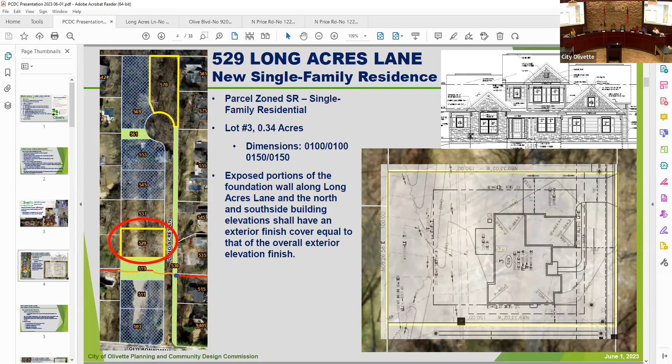Chairman, here you have the petition for 570 Long Acres. This was also on our previous agenda, where there were several inquiries by adjacent property owners regarding the grading, stormwater drainage, and some enforcement issues during construction of the subdivision.

The staff was asked to contact the petitioner to get in touch with the adjacent property owners. I'll let him speak to that. I know he made attempts to contact them, and I've heard from at least one resident that they did have a discussion. I'm not going to say it was a resolution, but they did meet and talk about the site. I know the two adjacent neighbors are here.

But before going to that, I want to talk about this petition. Again, the grading within this petition isn't directed to the stormwater basin for the site. There are two basins on the site grounds, and this one doesn't use them. What MSD required here, and you'll see it back here, is an undisturbed buffer that is supposed to mitigate the stormwater on the site grounds.

Now, under our stormwater management ordinance, only the house footprint is exempt from having detention required on the site. Because this is a subdivision approved by the Metropolitan Sewer District with its own full detention system, it is exempt. But detention is not exempt for any of the accessory structures. So the pool itself will have to provide some type of mitigation for the stormwater generated from the pool grounds, because that was not accounted for when we did the preliminary reviews and the regrading.

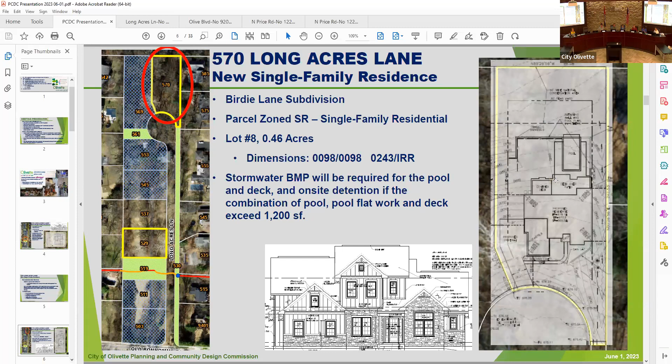So when you look at the pool and the flat deck work area here, that will be required to have its own on-site detention, separate from the house.

Now, there were concerns, and there were two components to them. One was regarding more of an enforcement issue during the activity of construction, and some erosion, siltation, and flooding experienced by the adjacent owners, specifically back in July and August. But also, overall, some of the grading changes adversely impacted the adjacent neighbors.

Regarding the stormwater and how it's handled on this site, I've blown this up a bit better. This is still the existing stormwater plan submitted by the petitioner. You can see the two houses here off of Dielman that directly abut the proposed, well, the existing lot with the proposed house.

You can see along here that the petitioner is proposing a defined swale that runs through here, redirecting that stormwater all the way parallel along the property line to the back of the yard, then natural flow back to what will essentially become floodplain after the new FEMA maps are adopted, specifically up by the bike trail. That would redirect any impact. They are also proposing a retaining wall along the front yard, which would help mitigate that.

And with what they're doing with the pool and flattening out the backyard area, that again removes a lot of the slope activity along the adjacent property. That mitigates either slowing down the velocity of the water, or redirecting the velocity of the water to the lower points, which are specifically back at the edge of the retaining wall. So I did want to point those out.

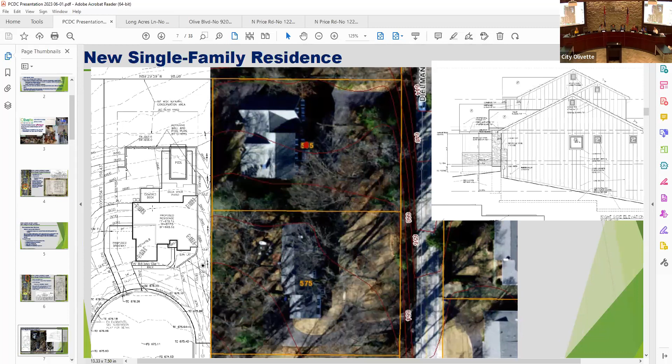Thanks. Okay, any other questions? Go ahead, Brian. We'll hear obviously, I imagine, from everyone, but I guess setting aside what happened or current concerns during construction, Carlos, do you feel comfortable that this will address any future, not worried about the now or the past, will this address future concerns around water, in your opinion?

Well, it won't completely eliminate any future potential impact. The grading has changed, I mean, no doubt about it. Compared to what was there before, it's been altered, but the direction still continues in the grand scheme where it's supposed to go, to the lower points in there. At that time, it was all dirt.

And the siltation had failed, and we had a pretty significant rain event in there that I would like to say is infrequent, but may become the norm over time. Once the property is improved and the swales put in place, it should minimize and not be recurrent like the conditions they faced, unless there was even more intensity of rain.

And there was two days of quite the intensity, but I could not say that we could get an event again that could cause a significant amount of stormwater going to lower properties. I think what they're doing at least tries to address it, but I don't want to make a promise that this would work. No, of course, because you never know.

I'm just curious, other things that you would suggest that wouldn't be above and beyond crazy or ridiculous to ask, but would also increase effectiveness. Well, I think by leveling with the pool and leveling some of that backyard and redirecting it, that does help in the process. And again, within that 12 feet, having that swale the full length from the front yard running all the way back.

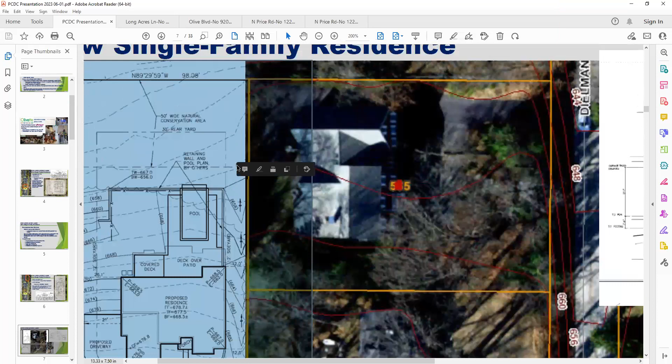Just curious - I know you weren't able to talk to the other neighbor and hopefully we'll hear from them, but would you be willing to do the same accommodation if they wanted it? Well, I'd be happy to help out, but going down to the next house to the north, which is basically at the bottom of the hill, he's collecting water not just from my lots - he's collecting it from the 3 houses above him. I'd be happy to help out in any way I can. We'll cut our swales in and do what we need to do on our lot, but I don't think I can remedy him not getting water from the 3 houses above him.

No, but if we can try to make sure it's not coming from the proposed residence, I think that's... Well, some of the water naturally went there always. With the pool and all that they're doing in the back, it'll help that substantially, a lot better than it was. And I think that's a positive aspect of it.

We'll grade the swales and do what we can, and I'll be happy to divert as much as I can. But after walking the site today and other days, he gets a lot of water from up above - he's getting it from the 3 lots above him, besides me. And the nice thing about ours, as Carlos explained earlier, with the curb of the street and the retaining walls of the pool and the detention, we're actually going to lessen the amount of water going his direction than was there originally.

Well, that's definitely the goal that we want. No, I agree with you. I don't want to be a bad neighbor, and I want to do whatever I can within my control to alleviate that. But after walking it, even if I do a little, the water's still going to go down - he's the low point on the right side, so he gets all the neighbors' runoff on this one lot.

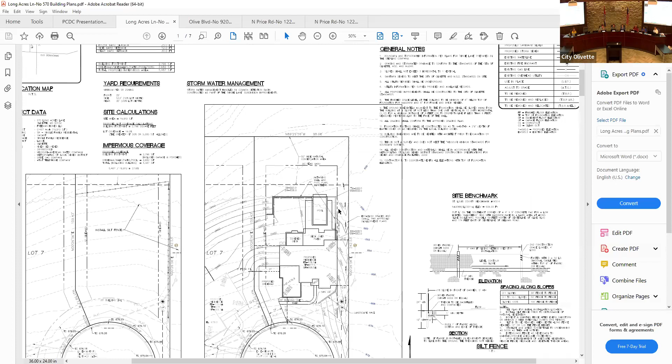And what I can do, Chairman, if you don't mind, is go back to the broader survey here. No, I was parked here. Hold on, like this. So yeah, somewhere at that point it starts switching sides.

What's directly to the north of the property? Is it the creek? No, there's an existing house just right about here. Bear with me one second and I can pull that up. So you can see the house structure here at 585, and then there's a house, a driveway right here, and a house kind of catty-cornered. So here's where that lot line runs through.

I'm going to jump back over to our PDF file. This may not be working online, but that house is roughly about on this area right here. So where the water's going to go in the uninterrupted area is more to the left, to not impact that house. According to that plan, yes. And then, this isn't on tonight's agenda, but if you bear with me one second, the property right behind them that we're looking at is petitioning for a subdivide.

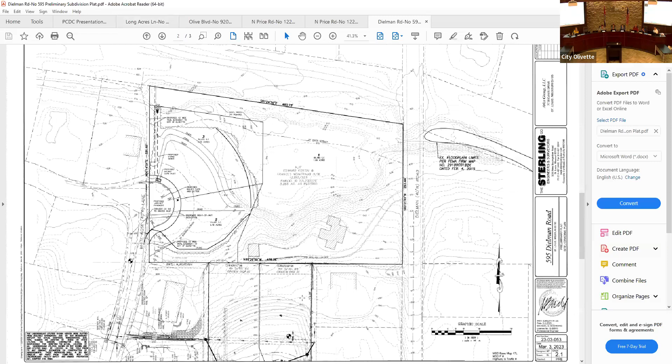So we can take a look at it here. I could have done an overlay, I didn't think about that. So here's where the new house and pool would be placed. And you can see a majority of that is headed northwest. In there, that break turns here and then starts going directly north, and then to the southeast on this side.

And I think you can see here. But Mr. Freeman's talking about that's what's coming down on here and then along the edge there. Well, we don't want to make it worse for people, you know. And it sounds like potentially what Mr. Freeman's saying is it could make it worse. I wasn't hearing you. You weren't? Okay, no, good, maybe.

Does anybody else? No, I think it's... No, what I'm saying is I don't want to - just like Carlos said earlier, I can't say it's going to be worse, but from the way that it's grading, it should not be worse. But I don't have the crystal ball. If we have a 4-inch rain, what happens?

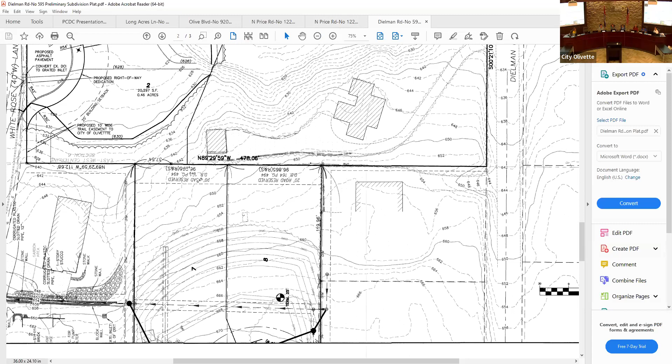Would you be open to adding some extra stormwater retention from the roof gutters, since you're already going to have to do something with the pool? I think what you're going to find out is that I'm going to run that to the storm detention anyway. But that roof gutter on the right side, as I spoke to Tom before, there's only going to be 2 gutter downspouts on that right side. That's the low side, the one-story area of the master bedroom, so that roof isn't going to collect a lot of water.

So the majority of the main roof is going to move to the other side, to the east or west. The master bedroom, that small single side you're looking at in the plans, would be on the east side, which isn't going to collect that much water.

Okay, go ahead, Karen. Yeah, it sounds to me like the developer has paid a lot of attention to this issue and designed the site carefully, probably as well as we could expect. We can't predict unknown future rains. The weather's changing, the rains are coming in harder, but how much harder, into what intensity, we have no way of knowing. But it sounds like for what we know, he's done a really good job to me. Okay, good.

Anybody else? How's everybody else feel? Good. Okay, unless you have anything else you'd like to say, otherwise I'm going to request some public comments. Thank you. Any public comments?

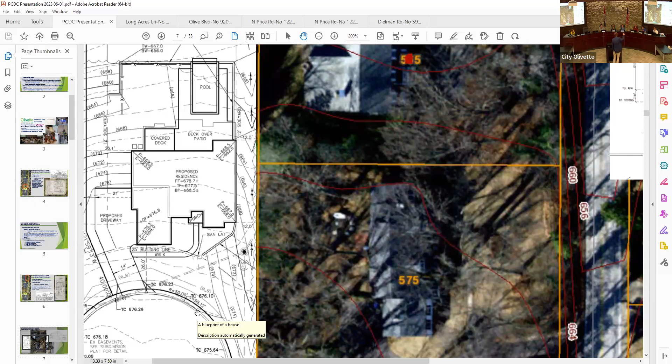With the grade and the proposed walkout basement — sorry, we shifted — about half of the building is fully visible as a 3-story building, 2.5 stories, and proposed to be right on the setback of 12 feet.

While undoubtedly fitting the conditions of the committee, I would not say this fits the community design standards of building with your neighbor in mind. That said, I met with Mr. Freeman today, we had a very nice talk, he's a very nice guy. We discussed the water issues, and he agreed the current swale in place is not doing its job. He suggested adding a berm, as mentioned. The retaining wall I had previously discussed, going from the house all the way to the property line, he says isn't possible because it goes above the sewer lateral. So understood on that — I thought this was a good kind of suggestion.

With all that said, I had a couple modest changes I'd like to propose. If we can lower the foundation by a foot, I think any little bit helps — that would stay within the current level and allow the standard 8 inches for the foundation. If we could move the house 2 feet off the current setback line to allow for the movement of the swale and the addition of a 2-foot berm, I would approve the slight elevation changes and access to my property. My understanding is a 2-foot berm would need 6 feet of elevation to the side to meet the 3-to-1 elevation rule, so that would go 2 feet into his property and 4 feet into mine. I'm fine with that, as long as we don't lose any big trees over it, but I think we're pretty far ahead — he seems like a good guy.

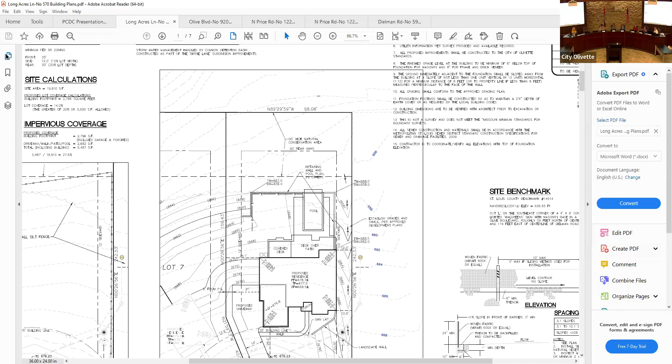Let's go back here. I'm not sure if they have a cross section here. Yeah, that's one of the things we didn't request in the process, to get a cross section along that street. So the only elevation you have is kind of that side here.

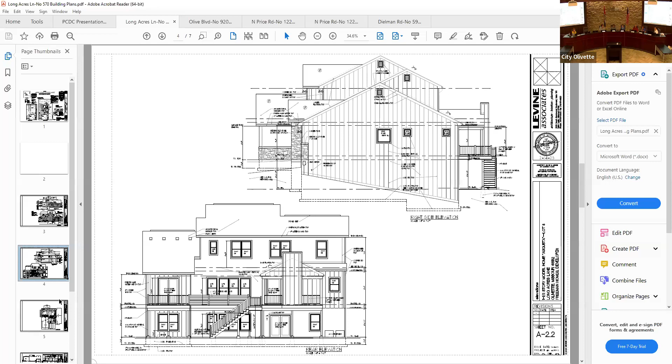I'm not the architect, but a designer, and looking at that side elevation, I know Mike and others usually request a little bit more in terms of windows or uniqueness on the side versus one window. Curious if anyone else, maybe we're not even approving that right now, but Carlos, do you mind going back to the side elevation?

Sure. Yeah. I don't know, others would know better. I'm an engineer, so. I'm a lawyer. Carol, you're on.

I'm not a designer, but I think it's broken. If you want my opinion, it looks like it is broken up rather than just one solid face. It does, the fact that it goes down more. I concur. If there was no articulation whatsoever, I'd say yes there's a problem, but there is some there, and I'm only reflecting what I've heard others say in the past in terms of adding.

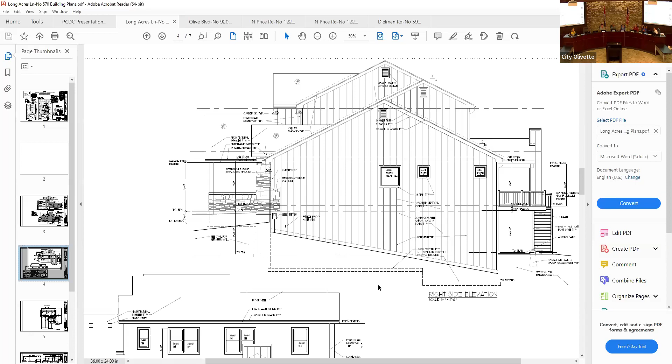I don't particularly feel strongly either way. Carlos, if you go to the contours, can we count them to see what's existing versus what's shown on the left? You can see the 672 here that gets to the curb, and their top of foundation is 677.5, which is about 26 feet away there.

So that's about a 1 to 5 slope. Is there any way possible to appease some of the concerns of the neighbors and reduce the top of foundation? I think the key thing would be that if you drop the foundation down, which again is possible, then you shift the house back, and that's something they'd have to consider in that process.

The reason is that to have the walkout as designed, this has to be higher than the elevation behind it. Right now you have a basement floor at 668.5, so that 668 kind of runs along here. Isn't that 662? That comes in and then veers back, the same thing, right here. So that's 6 feet higher.

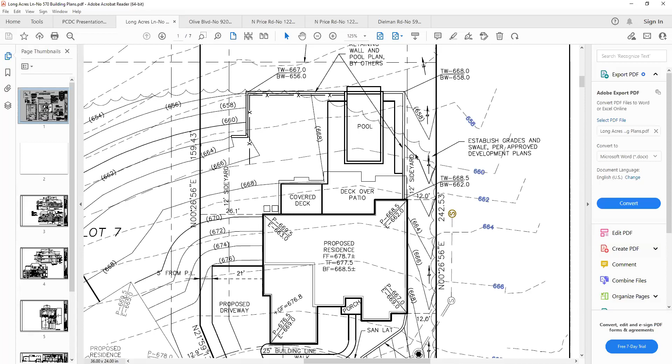You might see 12 inches less of siding, and I can see where they're coming from on that, but personally, I would leave it up to the engineer on how it really needs to set with the house that's being built currently to the west of it, with the driveway and all that. And I don't think we can correlate with Carlos on the aspect of moving the house, trying to move it back and over. It starts to affect a lot of other things, and I don't think those things affect stormwater.

Understood. Help me out, has lot 7 already been approved? Yes. Okay.

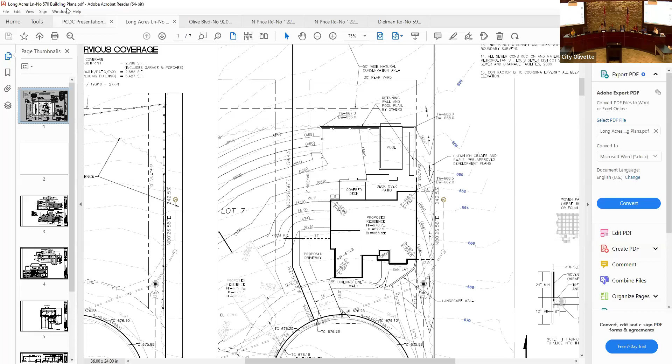Chairman, I'd like to make a motion to approve the petition for community design and concept stormwater management plan review for a new single-family home at 570 Long Acres Lane. The presented memorandum from the Department of Planning and Community Development dated May 4th, 2023, subject to staff conditions noted therein.

My only request would be if we add a condition that he speaks to his engineer to see if it would be possible, in relation with the other property, to reduce the type of foundation.

Can I add a condition to make sure they're speaking to the neighbor, maybe in staff presence, to look at other options? Not saying anything's wrong, because it's within code, but if they haven't connected in many weeks, that's my concern. Be a good neighbor in that regard. I would agree.

Carol, are you okay with this? I'm okay with this. Okay, good.

Motion's been made, amended. Just to note, in there because of the recordings, like Jennifer, when she goes back and takes a look at that, you had noted in the first one Commissioner Wagner made the motion, Commissioner Lewis seconded. Sometimes you'll follow it up, sometimes. Yeah, so keep doing that, right? Yes, alright, thank you.

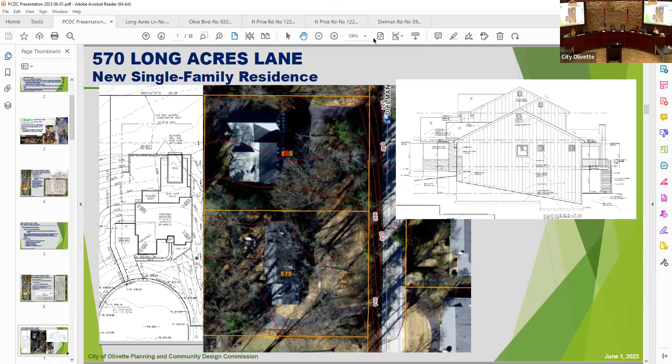Okay, we'll move on to new business. Carlos, I know you'll need some time, but I'll go ahead and introduce it. It's item A, 9200 Olive Boulevard, Suite 126, Shoppes at Price Crossing, the wine merchant.

All right, Chairman, I'm going to have 3 special permits before you, so I'm going to quickly go over the special permit process Ms. Doty put together for me here on the slide. Special permits are actual uses called out within the specific zoning district, but have additional conditions applied to them. Sometimes they're unique uses that, if they comply with certain standards beyond the basic underlying zoning ordinance, may be compatible with the surroundings or the district itself.

A special permit is reviewed by the commission, and the commission only forwards a recommendation to the council whether it should be authorized or not. The council considers the authorization through an ordinance. Each of these special permits actually have their own little ordinance that's codified in our code of ordinances. In there, it will identify the location, the use that was authorized, and any conditions necessary to mitigate a use that was placed.

The commission has a wide array of options to consider in efforts to mitigate potential impacts to the site and its surroundings. You can control hours, aesthetics, and things above and beyond what you'd normally control in a home review. If special permit uses aren't following through on their conditions, the city has the ability to pull a special permit, to rescind it and take it back. That's part of the process. There's a whole process on how that is determined, so it's not used indiscriminately, but that is in there.

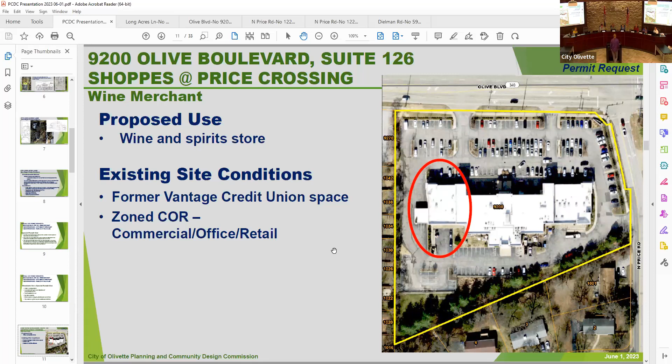Thank you. Glad you're moving in. Yeah, thank you, we're excited.

Are there any public comments related to this item? Seeing none in the audience — Carlos, is there any public comment online? No, sir. Okay, that being said, do I hear a motion?

Chairman, go ahead Carol. I would like to motion to forward a recommendation to the city council to consider authorizing a special permit use for the operation of a beer, wine, and liquor store, NAICS 4453, not to exceed 7,000 square feet, to be known as the Wine Merchant, as presented before the commission and noted in the memorandum from the Department of Planning and Community Development dated June 1st, 2023, subject to any staff conditions noted therein. Motion's been made by Carol Wagner.

Do I hear a second? Second, and seconded by Brian Lewis. Carlos, will you please call the vote? Commissioner Wallach, approved. Commissioner Lewis, approved. Commissioner Wagner, approved. Commissioner Jurgell, approved. Motion passes 4-0.

The next step is that this item will go before the city council. We anticipate the first reading would take place on June 27th, and a public hearing on July 11th.

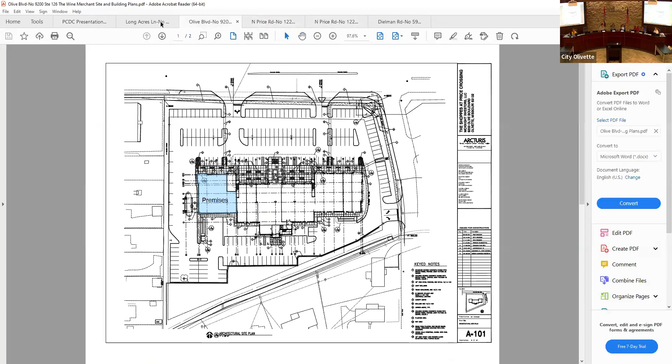Then that would have to go to council. And I do have a representative of the petitioner here. You do have plans of the building. It's a very simple building for storage. The information regarding the exterior finish is important because that's where a majority of what we do in that process, so I do want to go over that real quickly.

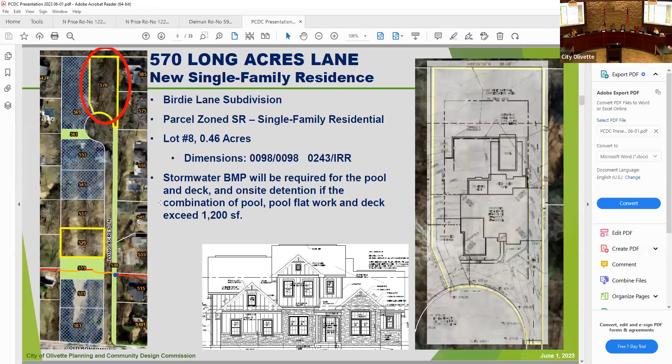I think I just closed my presentation. Bear with me one second, Chairman. No worries. I don't see it. Yeah, I have it.

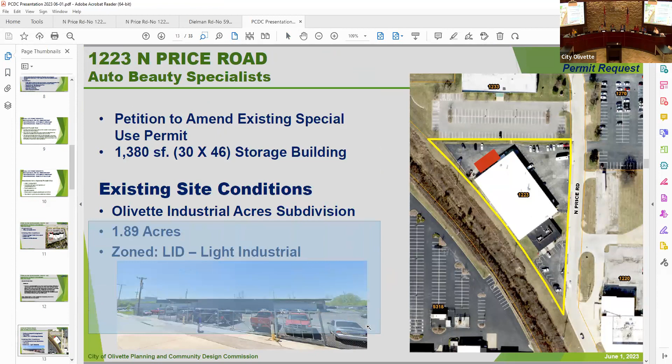Okay, so here's an elevation of the existing building. You can see they have some seam metal along this elevation here. I don't think getting any closer is going to show you in there. Now, within your plan set, I did ask for something more specific as to what that exterior finish would be. So you see it's a metal panel system, not corrugated in any way like the front exterior is. It would essentially be a similar type of building on the exterior.

What's the building going to store? I will let the petitioner answer that. I know there's been discussions within my staff and the fire marshal, but I think it's more the additional parts and things as they're transitioning to electric vehicles. This looks like a paint booth. This is a paint booth within the building itself, but the exterior finish is going to be similar to that panel system. Understood, understood, thank you.

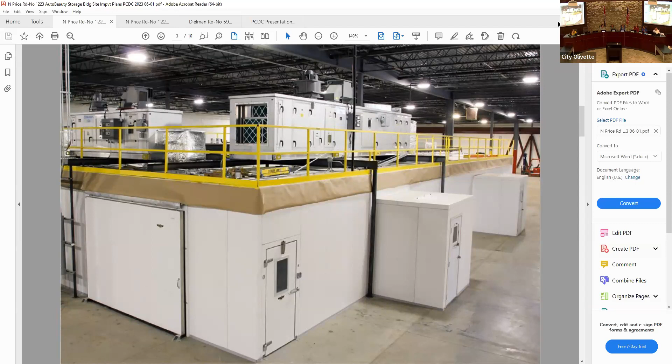Okay, anybody have any questions or comments for Carlos? Carlos, when I was looking at the site plan, it looks to me like this building would be pretty much hidden from view because there's an easement behind the building and there's a parking lot on the other side, and the building itself sits at an angle. So it's not something that most people just coming past the building or going into it through the front are ever going to see.

Correct, and we were cognizant of that, and I think they took that into consideration as they looked at other opportunities within the site grounds. Similar to what we just had in the petition a while ago, they did approach the Murphy Group because the Murphy building is kind of situated facing the back of their property. So they did reach out to them and had a discussion. I'll let the petitioner address that, but there was no opposition. And then we also did our notifications in the process.

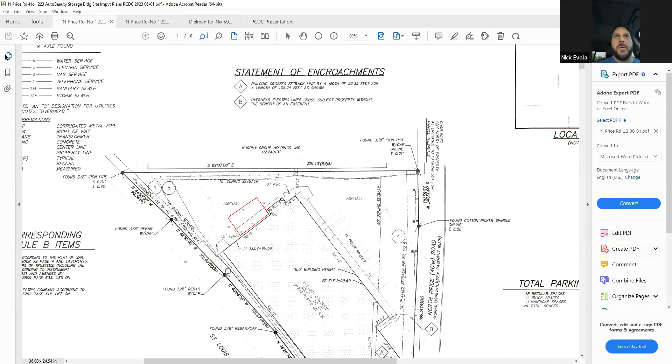The purpose of this storage area is to free up room from our existing building to focus on a lot of the proprietary equipment and everything we're getting for the electric vehicles and our business model change toward electric vehicles that is happening in the existing building. It's just freeing up the room from that area.

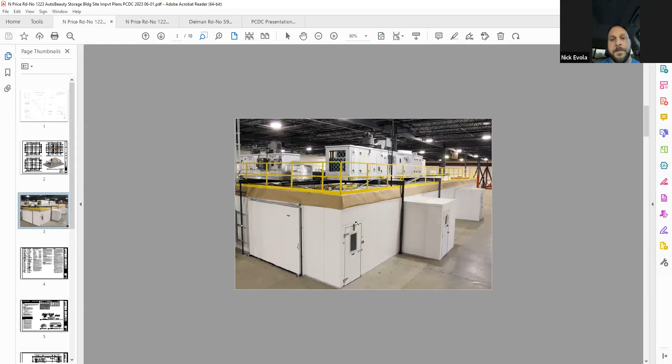Makes sense. Are you going to have to enter and exit that building from the outside, or will it be connected to the building from the interior? It will not be connected, so it will be separated.

We've done all the fire code work to make sure that where it is placed with the existing building we meet fire code, and we're still able to have enough distance from the Murphy lot to meet the Murphy lot for the fire truck or fire department to be able to go through.

Good. Carlos, did the fire department have any issues with this? No, not under this scenario. They work closely with Fire Marshal Fain, along with our senior building inspector Kurtz.

This was interesting in terms of what they looked at trying to do to add the additional storage space, finding out that through the building code, doing an addition opened up a whole bunch of other issues regarding firewalls, the sprinkler system, fire suppression, and all that. The most reasonable and economic means for the purposes of what they're doing was to have it detached. Then the question became how much detached, and I think the ultimate compromise was the 2 feet before we started going into another bunch of code issues.

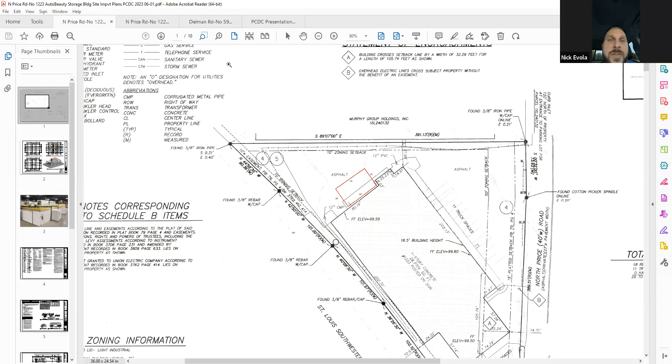We will be doing both. We're not going away from traditional vehicles by any means, that's still primarily our workload. But as Carlos mentioned, we have Tesla now, and we are currently looking at two other manufacturers, Rivian and Lucid. It's definitely something we're pushing forward, trying to be ahead of the game as far as the collision industry, and we like to consider ourselves one of the strongest collision repair shops in the state of Missouri. So we have a lot of certifications and accolades to back that up.

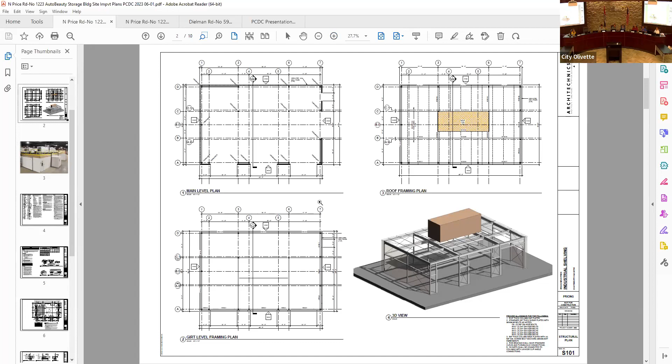Thank you. Does anybody in the audience have any questions or comments related to this agenda item? Seeing none, Carlos, can you check online? There are none, sir.

Okay, do I hear a motion? Mr. Chairman. Go ahead, Carol. I'd like to make a motion, and I'd like to do this as an amendment to the existing special permit.

Does that seem reasonable to all of you? I'd like to motion to consider the petition for a 1,380 square foot storage addition at the property addressed as 1223 North Price Road, as an amendment to the existing special permit use authorized under ordinance number 2565 to Auto Beauty Specialists, and approved for the site plan, community design, and concept stormwater management plan reviews as prepared before the commission and noted in the memorandum from the Department of Planning and Community Development dated June 1, 2023, subject to any staff conditions noted therein.

Motion's been made by Carol Wagner. Do I hear a second? Second. Seconded by Sam Wallach. He beat you just by a hair.

Carlos, will you please call the roll? Commissioner Wallach, approved. Commissioner Lewis, approved. Commissioner Wagner, approved. Commissioner Dragell, approved.

The motion approves unanimously as an amendment, and therefore the next process is for the application of the building permits to proceed. Thank you, sir.

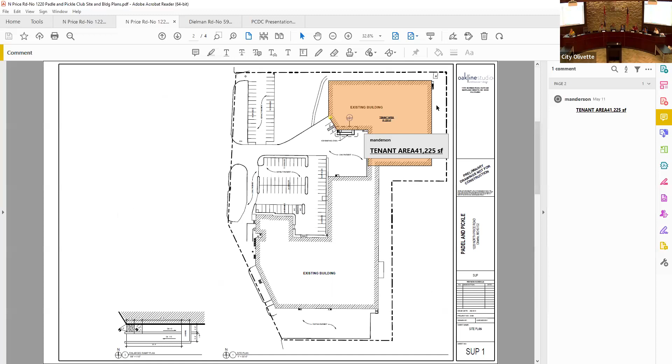They're looking at a St. Louis location. They like the site here, and you have copies of the plans that show both the site grounds and the area they would lease, which is a little less than 42,000 square feet, along with how they would design the interior and the number of courts.

They're not asking to utilize the basement area in this proposal, and that could be a future leasable area for a different use. That's the breakup of the building.

But I'm going to go back here—it would be a private for-profit club. You have a description of the business and the proposed business hours, along with a bit of information on the business model as a whole.

We have a representative here with Intelica CRE who can address any questions.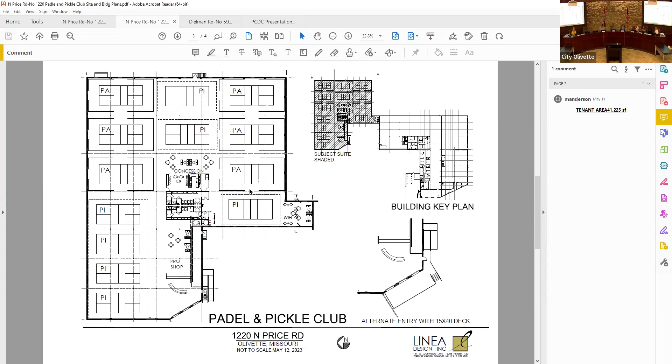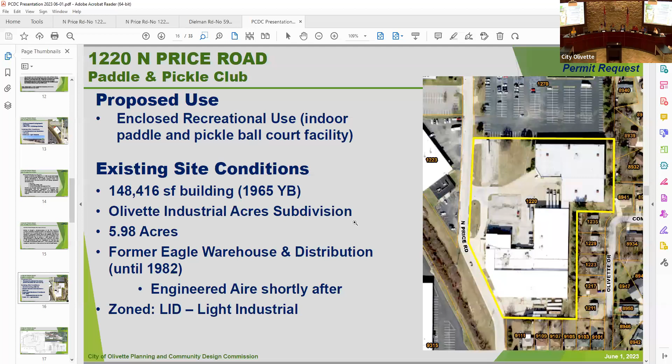In terms of the review, this was a unique use, but recreational uses are authorized within our light industrial district. I think it's a good reuse of the site, something different, something not anticipated.

The only issue that would come up in that process would be parking, because this initial building was designed as a warehouse, which has a minimal parking load. So we did take a look at how a use like this would impact the reuse of the rest of the building, and it's pretty reasonable. I think our parking requirements for warehouses are pretty high, and we haven't touched those in a long time.

We probably need to reevaluate those, but they have approximately 121 defined stalls on the site. They can have a lot more depending on how the site is laid out.

The surface areas of the site are laid out there, because this was a traditional warehouse type of user, but if we go into more entertainment or service type of businesses, a lot of those dock doors probably won't be operable, and you won't need the big maneuvering areas that were necessary for some of those.

So at least, visibly, there is at least 121 stalls on the site. The current user or proposed user would need 26 by code, and we ran different numbers. Of the 121 stalls, all they need is 26, so they would be okay. But we have to be cognizant of what about the rest of the building, and how that is going to impact the viability of the building.

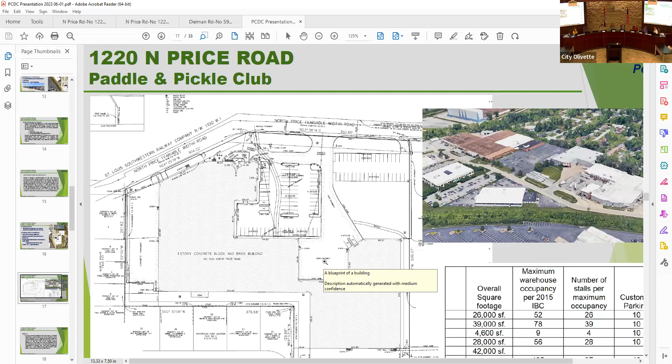If they restripe here, depending on who their final users are, they can probably pick up a whole bunch of additional stalls. Right now it's kind of laid out for the traditional warehouse drop-off, pickup type stuff, so they'd have the lot near the curb, and then there'd be a large green space in between. The one thing I wish I could do is, green space is not sacred, especially converting that green space into additional parking, which I think would be beneficial.

You see it as it's utilized over here. However, that then may trigger MSD requiring some type of on-site detention, which might make viability or reuse pretty difficult.

Carlos, what's the building made of? Is it concrete or is it metal? I believe it's concrete block, it's masonry. I was just concerned about noise. Yeah, good question. Yeah, we did talk about that. Go ahead, Brian. I'm sorry.

They mentioned a bar as well. Is that okay from a zoning perspective? Like them serving, is that in the area zoned to allow that? It's an accessory to the primary use, so therefore it would be permitted. And there may not be a bar where I can just walk in—you'd need to be a member. But if I'm a member, it would be one of the amenities I would have on site.

So it's not treated like a restaurant in that regard, correct. It would be for members only. Interesting. They would need a liquor license, but they're not under the same conditions as a Phelan's or something like that.

And the special permit would recognize that or note it in the site plan as they've illustrated. Very exciting new use for this. I think every once in a while you get these, wow, never thought of that, and we can make it work. And we had a good partner in this process.

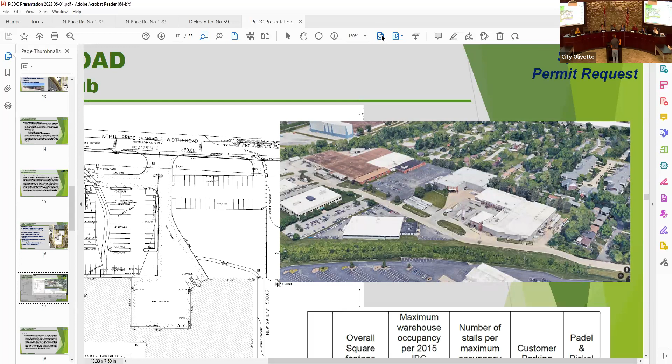Is there a petitioner from the tenant side online? No, there's nobody on. Just making sure. If you can state your address and whether you're related to the building, residential or business. Business: 11701 Borman Drive, Maryland Heights, St. Louis, Missouri, 63146.

I can do my best to answer any questions you might have. I'm a little more familiar with the building than the pickleball concept, but on behalf of the landlord, I think it's a great use for the site. We're excited about it. It's an industrial building, a warehouse, in the heaviest industrial zoned area. I think it's a great reuse, and it's the fastest growing sport right now in the United States.

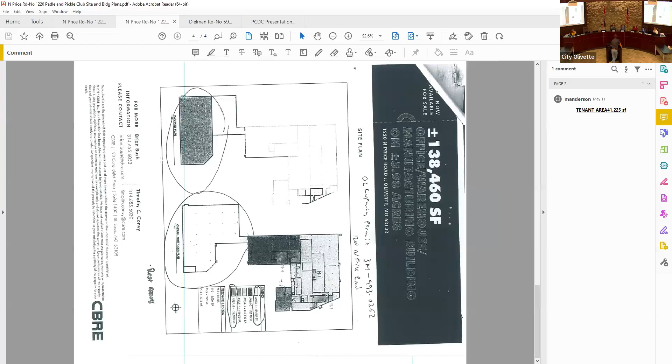Does this company have other facilities in other parts of the area or country? Their business plan has St. Louis being first. I believe there are a couple of professional players on the ownership team, along with some local St. Louis investors, so St. Louis is their first location. I believe they want to go to Cincinnati, Indianapolis, Atlanta, and some others, but they chose St. Louis first. That said, there are indoor pickleball and paddle courts opening in other cities — they're trying to corner the Midwest market.

It's very exciting. Very nice. I don't have any specific questions. Does anybody on the commission have any specific questions or comments? No. Thank you very much. Thank you, appreciate your time. Carlos, again, in their packet of information they did provide a pretty good overview — I glanced through that. Okay, just to make sure.

It was very interesting. Does anybody in the general audience have any questions or comments on this agenda item? Seeing none — Carlos, it might be worth mentioning there are pickleball courts planned at one of our parks, and it may be a nice complementary use for tournament play. Yes, I'm hoping, especially to practice in the off season.

Carlos, anybody online? No, that was it. Okay, everybody — sorry, I didn't mean to cut you off. No problem, I wasn't aware of the question. So there's nobody else outside of us now online.

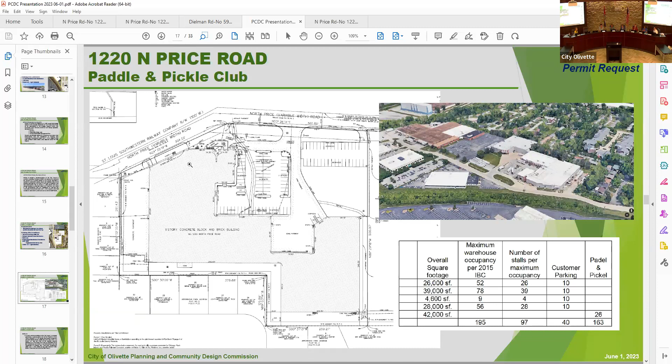Go ahead, Carol. Oh, we already did it, didn't we? No, you didn't. Okay, no sorry, motion yet.

Mr. Chairman, I'd like to motion to forward a recommendation to city council to consider authorizing a special permit use for the Paddle and Pickle Club to operate a 41,225 square foot private membership club featuring indoor paddle and pickleball courts, clubhouse, bar, and pro shop at the property addressed as 1220 North Price Road, as presented before the commission and noted in the memorandum from the Department of Planning and Community Development dated June 1st, 2023, subject to staff conditions noted therein.

Motion's been made by Carol Wagner. Do I hear a second? Second, and seconded by Sam Waller.

Carlos, please call the vote. Commissioner Waller, approved. Commissioner Lewis, approved. Commissioner Wagner, approved. Commissioner Trio, approved. The motion passes 4-0.

This item will now go to the city council, and that will be scheduled for their first reading on the June 27th meeting. Okay, thank you, appreciate it.

Okay, we'll move on to item D, which is 10401 Baur Boulevard, RP Exotics LLC. Chairman, I'm going to ask that item be deferred. Oh, okay, thank you, sir.

So we'll then move on to item E, which is the text amendment, chapter 445, urban agriculture regarding bamboo.

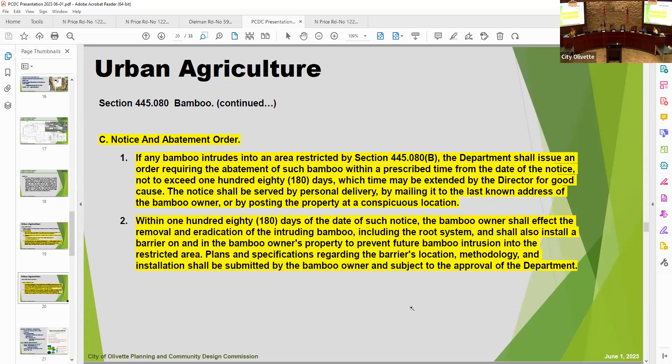So we'll move on to staff reports. The first item is our next meeting is June 15th. We do have 2 house petitions that would be scheduled for review along with a subdivision plat, and then items that were deferred that might give an opportunity to have Mr. Martin. If not, we'll schedule that for July.

July 4th falls on a Tuesday, and our first meeting in July would be July 6th, that Thursday. I'm asking for the commission to reschedule or cancel that meeting. It's just too difficult on a shortened week to get the preparation ready for the commission. I have no issues with it. Does anybody else? I think it would be considered our summer holiday. So that would put us, after the meeting, at July 20th. Either I'll have them at the 15th, next in 2 weeks depending on the schedule, if not the 20th.

Outside of that, we've seen progress continue along the Olive Corridor. It is pretty slow there at Olive and I-170. A lot of it is how difficult the site was and the utilities that had to be addressed. But finally, those 3 pole stubs at the corner of Olive and Price were removed, and that was a big feat because utility companies were pointing fingers on who's responsible, and nobody wants to do it for free. I can understand that process. Once that got removed, things started moving along in that area.